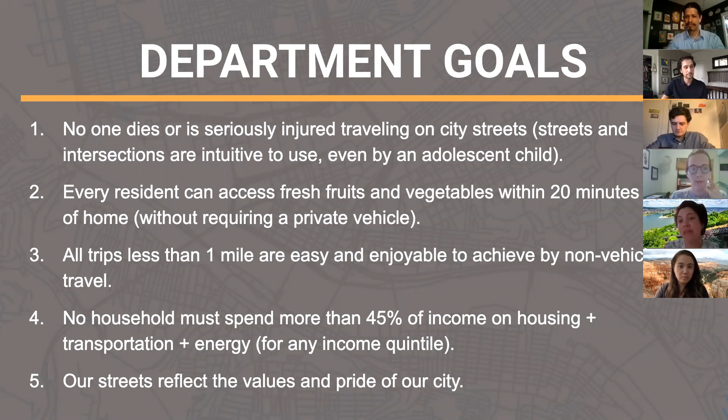So a quick overview of our project process. All of our projects undergo these 3 major steps. We start with planning, where we talk to communities and we learn about needs and ideas. We move into design, where we check the feasibility of those ideas and figure out how to make them work into the environment where they're proposed. And then finally, if we're successful with all of that, we move to construction, where we bring those ideas to fruition.

This project tonight that you're about to learn about started with a number of planning processes. Our Bike Plus plan, which I'll go into in a moment, was one of those documents where we engaged the community through a number of meetings and had hundreds of inputs from residents like you. And this was one of the ideas that came out of it, of something that they'd like to see to make their lives a little bit better. There are other plans that actually specifically identified Brighton Road for improvements, but I'll let my colleague Sean go into those as part of his presentation.

Community outreach, which this meeting is a part of, is a component underlying all 3 of these phases, beginning with those plans, which had a lot of community engagement, to specific design meetings like the one tonight, where we want to talk about a proposal and get your feedback on what works and what you might like to see changed.

And finally, with construction, making sure that when we go to implement these changes, that you know about it and you're not surprised by someone tearing up your street one day. Not that that's necessarily proposed as part of this project, but we want to make sure that through every step of the process the community that will be most impacted is on board and aware.

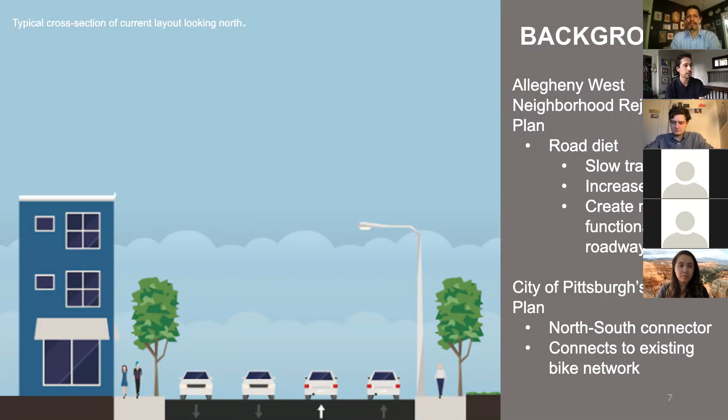And a little bit more about the existing conditions. Like I said, it's a two-way street with parking from Ridge Avenue to Western, and then continuing north from Western to North Avenue, it is still a two-way street, however, with those 2 travel lanes in each direction with no parking. The lane widths on this block are rather wide, which creates a condition that has been known to increase speeding. And speeding was actually identified in the neighborhood plan as well. The existing bike network here is shown in bright green. There are currently bike lanes along West Ohio Street in Allegheny Commons Park and the cycle track around Allegheny Circle.

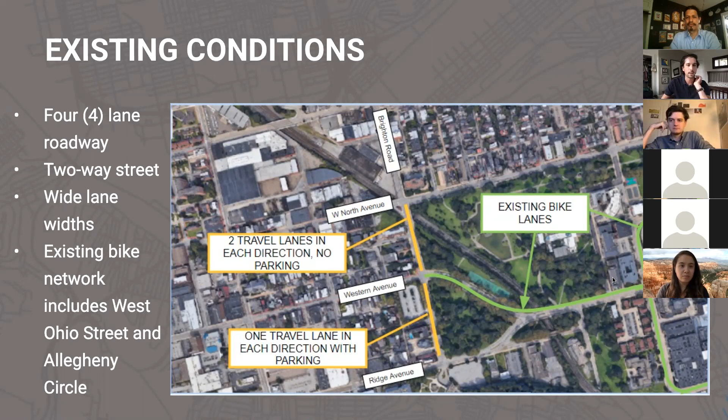So what we are proposing is restriping these 2 blocks of Brighton Road, reducing travel lanes from 4 to 2, as well as adding to the bike network. This project is part road diet for 1 block between North Avenue and Western. And again, a road diet is to slow traffic, increase safety, and provide more room for other functions along the corridor. And these other functions that we are proposing is adding parking between Western and North and installing bike facilities. We're proposing a parking protected bike lane on the western residential and business side here, and then a buffered bike lane on the other side of the roadway fronting the park here.

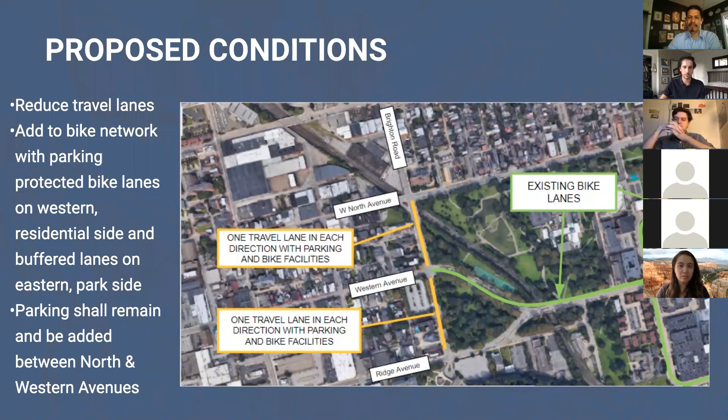This would connect to the existing bike network that we're trying to expand on, as shown with the bike lanes through the park and Allegheny Circle. And this would provide safer access to the park and the business district along Western Avenue. So a little bit about parking protected bike lanes before we dive into the plans, as these facilities are rather new to the city of Pittsburgh. They are one of the safer forms of bike lanes for cyclists and are low cost and rather durable. There are 2 renderings on the right-hand side showing how they work.

So from the edge of curb, you have the bike lane itself, a painted buffer, which is the hashed out area, otherwise known as the door zone, so that people can enter and exit a parked vehicle, and then the parking lane. And some of the benefits of a parking protected bike facility is dedicated protected space for cyclists in order to improve comfort and safety. It eliminates the risk and fear of collisions with vehicles. It also reduces the risk of dooring compared to a standard bike lane. And dooring is when drivers open their car door without looking, and an unsuspecting approaching bicyclist doesn't have enough time to react, striking the door, injuring themselves, and potentially injuring the driver exiting their car.

Further, these facilities prevent double parking in a bike lane. They have a rather low implementation cost by installing new pavement markings and making use of the existing pavement. And it is more attractive for cyclists of all levels, ages, and ability, which is something that we are trying to promote with the Bike Plus plan. And this being near the park is an added advantage.

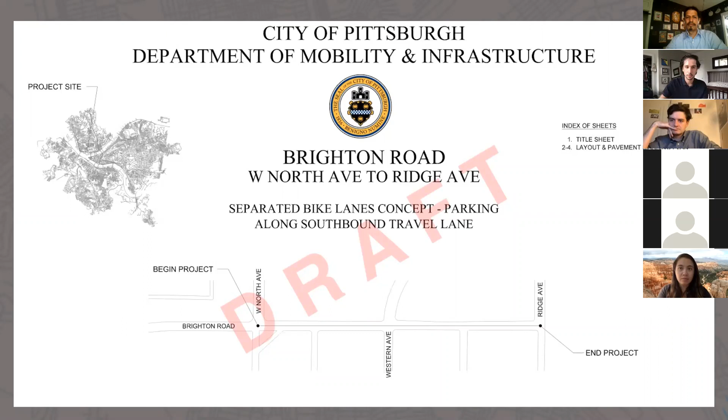So moving forward, I'm going to start discussing the preliminary layout for the project. I know that these can be hard to view in a video call format like this, so please bear with me while we walk through it. We're going to start at Brighton Road and Ridge Avenue near the Community College of Allegheny County, CCAC, and then work our way north. So the travel lane configuration would remain the same as today, with this added buffered bike lane on the eastern park side here that is shown.

And then the parking between Ridge and Lincoln on the western residential side here would be maintained with the installation of the parking protected bike facility shown here in the hatched out area. And again, the line shown in blue represents the parking that will remain in between Lincoln and Ridge.

So up to the intersection with Western Avenue, the travel lane configuration still remains the same as today, and then the new facilities would be the buffered bike lane that continues on the eastern park side here, and then parking between Lincoln and Western on this residential side is still maintained with the installation of a parking protected bike lane. Again, this is represented by the large blue line here.

And then after crossing the intersection with Western Avenue, this is where the road diet would begin. Travel lanes are reduced to 1 lane in each direction to slow traffic and increase safety, with additional parking being added between Western and North with this parking protected facility. And those are represented again with the yellow-orange lines here and here.

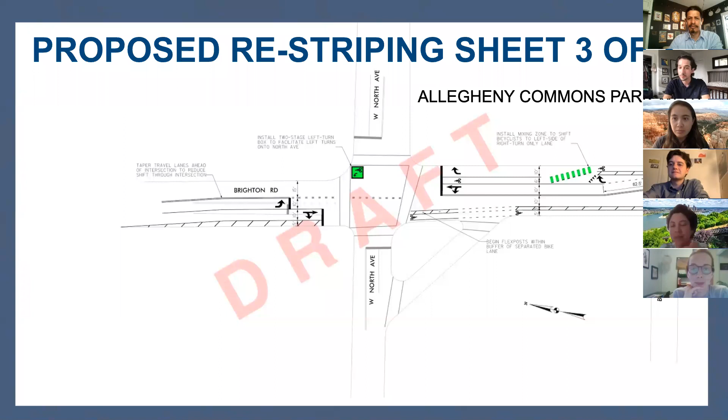Yeah, that's good. Sean, can you put the slide that has the survey link on it one more time? Yes. We want to make sure that everybody knows that tonight is not your only opportunity to provide feedback. The survey that we have on our website is another place where you can go in and answer a number of questions about different aspects of this project. We will definitely take all of the comments and questions that we've received tonight into consideration and see what we can incorporate into the design. But if you have any additional questions moving forward, please check out DOMI's website. Please fill out our survey, and we'll be happy to consider any recommendations that you might have.

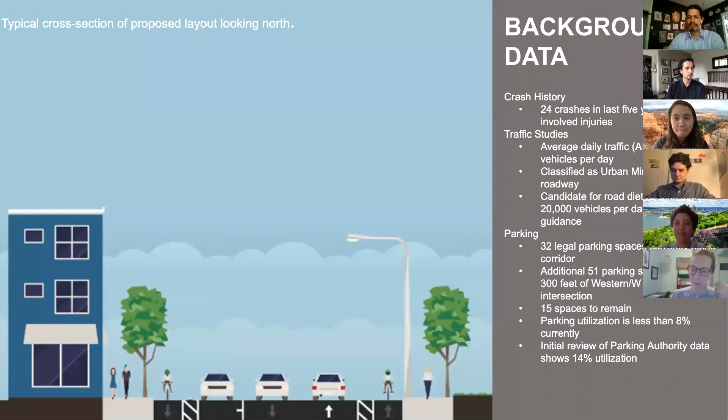So there's a number of spaces that are being maintained along this corridor and with the adjoining streets. There's parking available along Western, West Ohio, Ridge, and Lincoln. This is a mix of permit parking and pay parking. And so there's quite a number of spaces available in the surrounding area.

Robert has a question. Why did DOMI add a right turn only sign at the southbound Brighton/Western intersection when these plans will eliminate it? So I think that was initially added because, if you're looking at the layout here on sheet 2, that I hope everyone can still see, right now between Western and North we have the 2 travel lanes in each direction. And so since there's a parking lane on the receiving end here through the intersection, this has to be a right turn only lane. Otherwise, if a car were to go straight here and someone was parked, they would obviously run into a parked car, or there would be a conflict through the intersection where 2 competing vehicles are trying to go straight at the same time.

So I think to make it clearer for drivers, with the current configuration, the right turn only signage was added to facilitate right turns onto Western. Robert is wondering, why is it necessary to add any parking on the 900 block of Brighton? Since we do have a slight reduction in parking, we were trying to maintain as many parking spaces as we could and still have safe bicycle infrastructure.

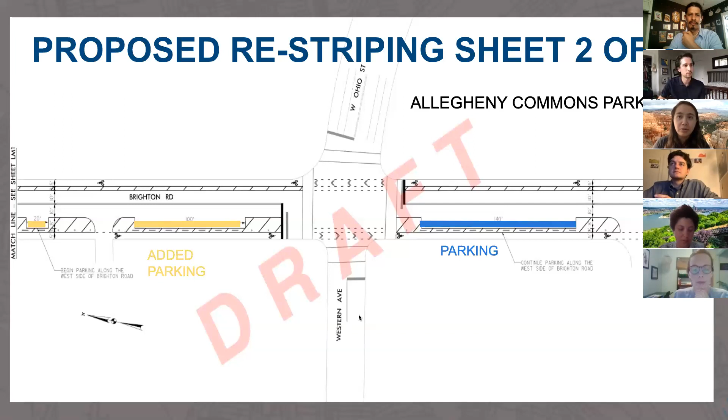Doug wants to know, 705 Brighton is the last residential property that you are omitting from Lincoln to Ridge. You are keeping residential permit parking and missing this residence. Why? So I'd like to know a little bit more exactly where 705 is. I can't really identify that right now. But Doug, if you'd like, fill out the feedback survey with your email address, and if you would like to discuss this in more detail with me, we could do that. But I would like to have some more information about exactly where you're talking about.

I think, is that all the questions, Anna? Yep, that is it. Other than that, there is a comment from Allison, saying that as a CCAC student, Allison sees that the bike racks are typically full on decent days, but less busy on colder days. Just a comment.

Okay. Well, thanks everyone for joining. We really appreciate it. As Kim and Ricardo said, please fill out the feedback survey, and this is the first of meetings to continue. And we're going to take these comments and make some revisions to the layout and still look at your feedback survey comments as well.